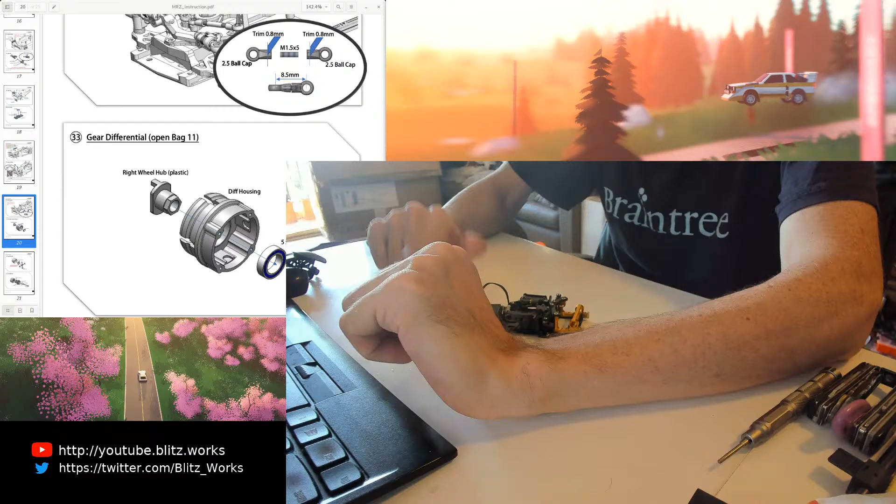We're live. Okay, so we're going to be building the MRZ a bit more.

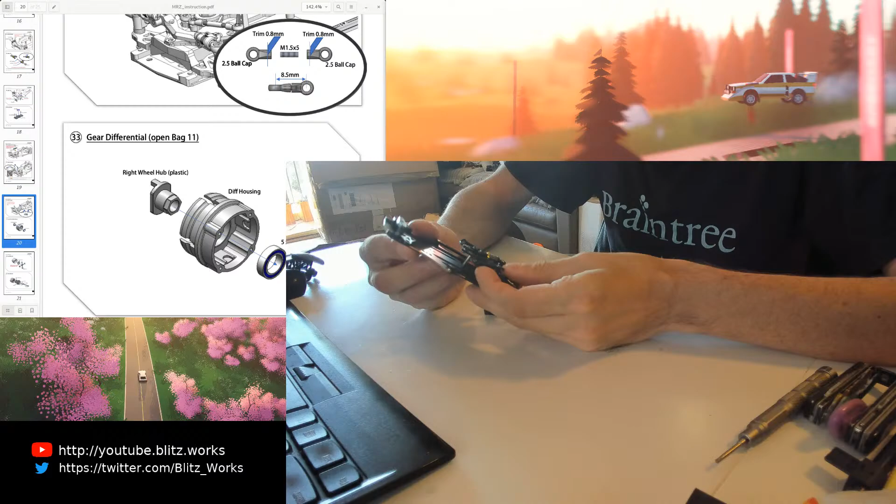Now, I wanted to do something a tiny bit different. I'm just inspecting, actually. Before we do that, let's turn on some lights, because it's really dark here. There we go, that's a bit better.

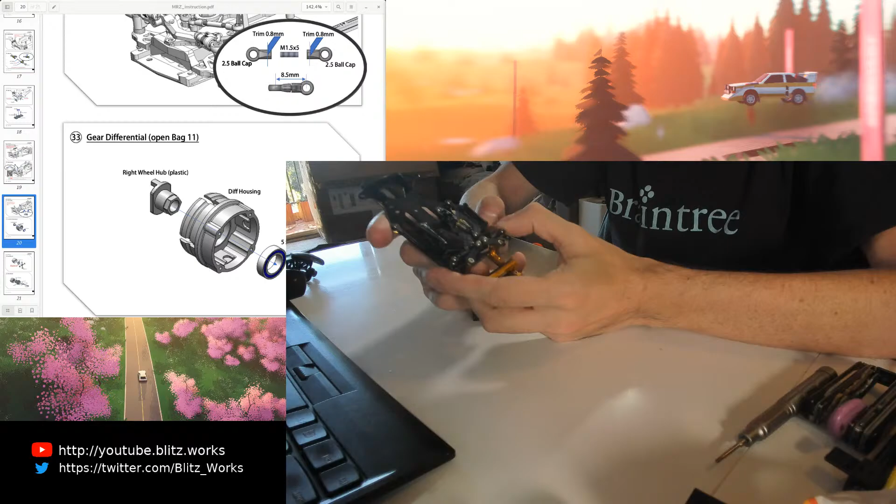Just inspecting the top part here where I ended up putting some nail polish. Let's add a bit more light while I'm at it. That seems to have come out fairly well. I wonder if I can get that sheen on it so you can see it. Black on black is actually really hard to photograph, but there you can see at the top there. Doesn't look too bad.

Looks about the same in real life, but that's fine. Let's just adjust the light a bit more.

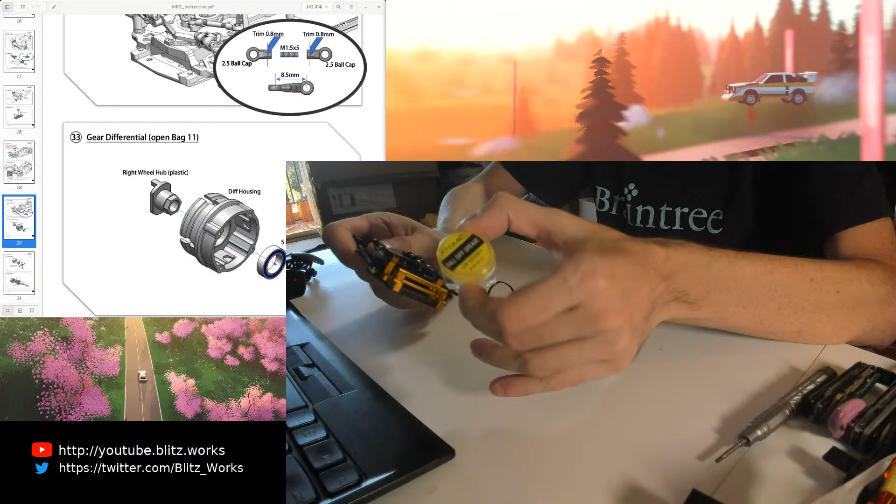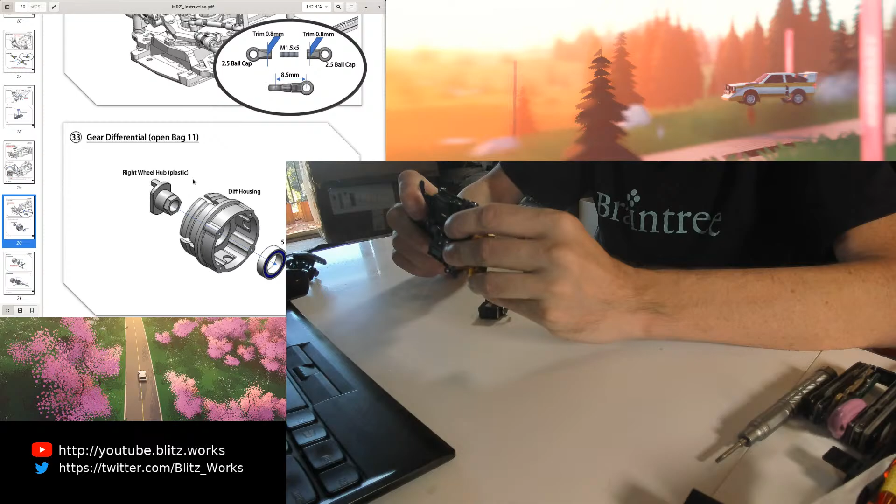Now, I thought we'd do something a bit different. So we're supposed to continue on with the front steering, but I looked to my left and found out I had the ball greases from Atomic. And I thought I actually might work on the rear diff here, as you can see, and get that built. Then depending on how long that takes, if I've got some time, finish off the front suspension setup.

Wow, that rear suspension setup is actually pretty solid. I'm really super happy with that. I think that alone is going to make it a very nice vehicle.

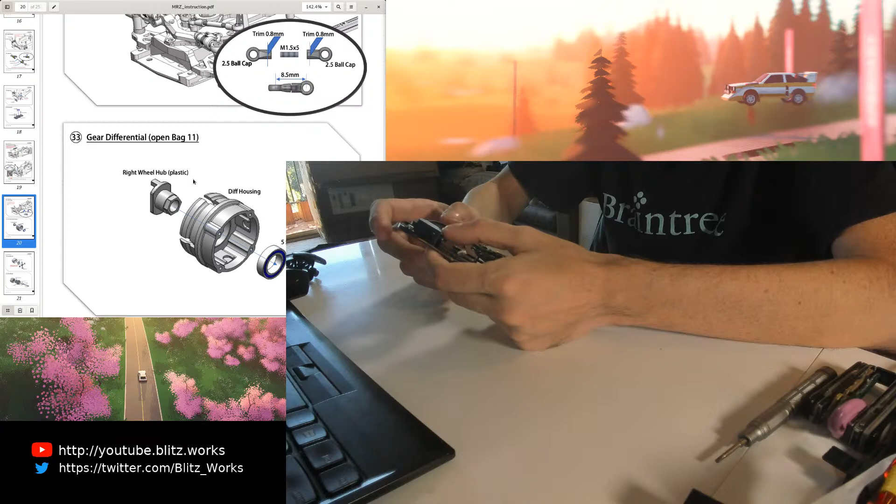The other thing is I had one of these spare, just one of the high voltage Atomic servos. Fits perfectly in the front here, as you'd expect, because it is an Atomic car. I could have used my normal ones, but I had one of these Atomic high voltage ones spare, and I thought I might as well use it. The interesting thing about this one compared to the ones I normally use is this lead here was a tiny bit longer, so it's going to give me a bit more flexibility about where I put my electronics here.

When I did just a quick pre-fit, I didn't actually have a lot of space here, and from memory I needed a slightly longer cable, so basically it's a good opportunity to finally use this one up. That works pretty well.

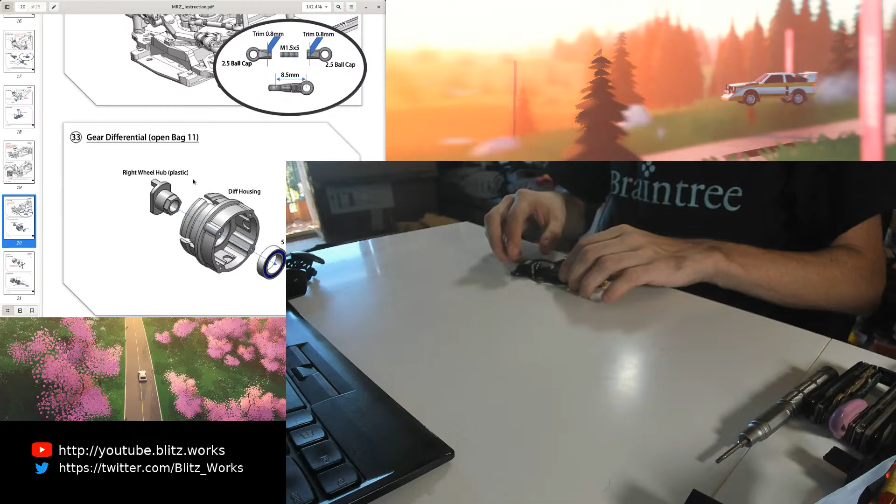Cool, without further ado, let's get into building the gear diff. So we're going to need bag 11, and it looks like all the gear diff stuff's in there. I'll put this to the side for the moment. Hopefully I don't need it anymore.

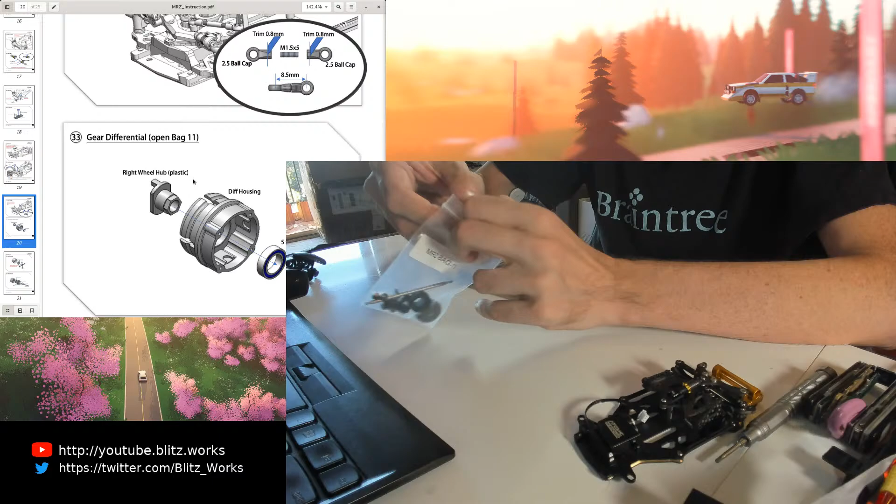I had a quick look at how the construction goes with this, and it seems pretty straightforward. As I said in my pre-review of the manual, it does have some innovative features in terms of changing how many teeth are on the rear gear. So I think that if you're jumping between tracks, that'd definitely be a bit of a killer feature.

So you've got this little gear thing. Actually, I might just quickly set the focus on the camera so it doesn't do that shimmery stuff. Turn off autofocus, update, let's put that at 20.

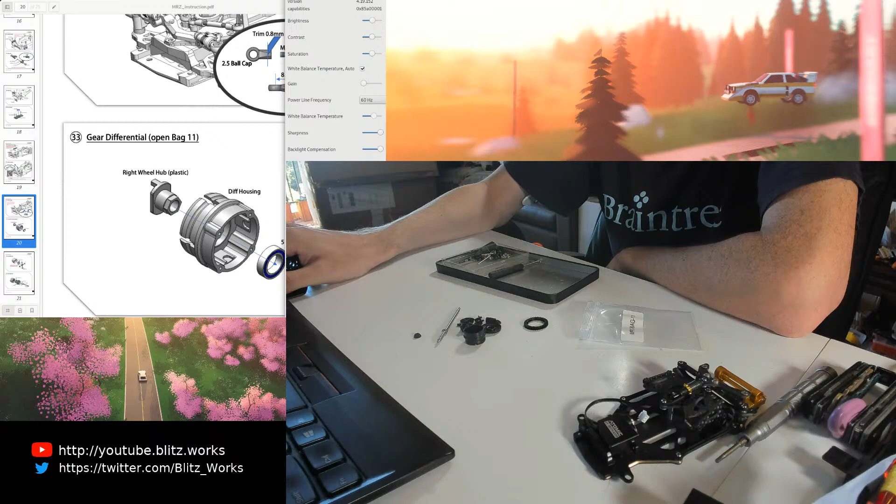15 is good. So we've got this gear piece here, and that just slides onto this. Normally you'd end up replacing this entire piece every time you want to change gears, but with this one you can just, without disassembling the rear diff, slide this piece on and off, which is kind of awesome.

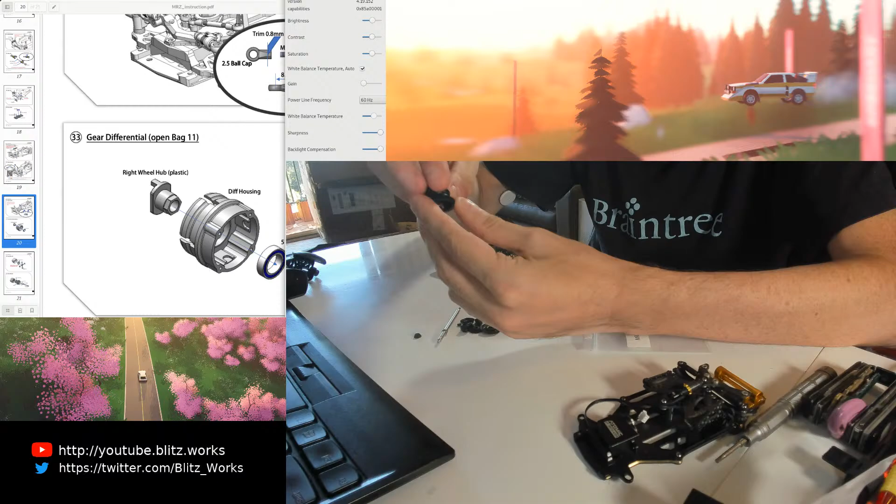So a quick look at how that all goes together now. Okay, it goes like that. Cool, so let's close this silly little window here first.

Gonna need some ball bearings as well, which are probably in another bag. Yes, they are.

Now, the one thing I have not decided is if I go for a stiff grease or a light grease with the rear diff. Still a bit undecided.

These bearings all do look the same. Do I need a half shielded? I'll have to measure this up with the calipers, I think.

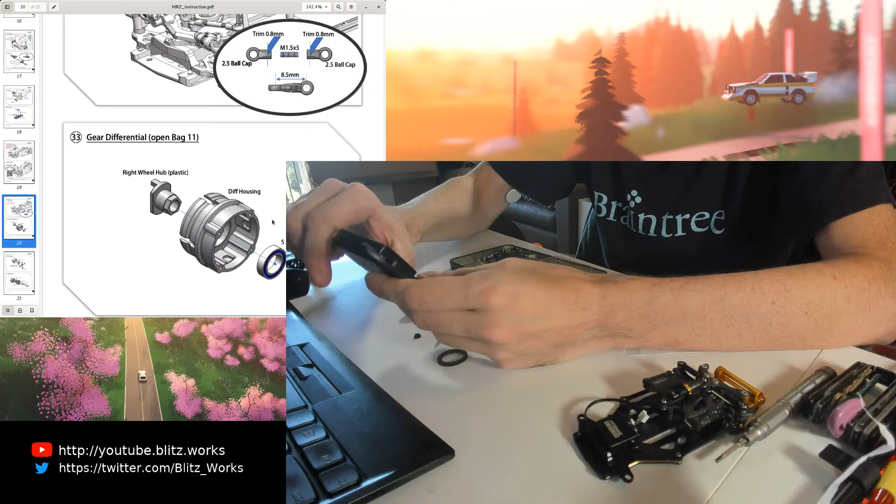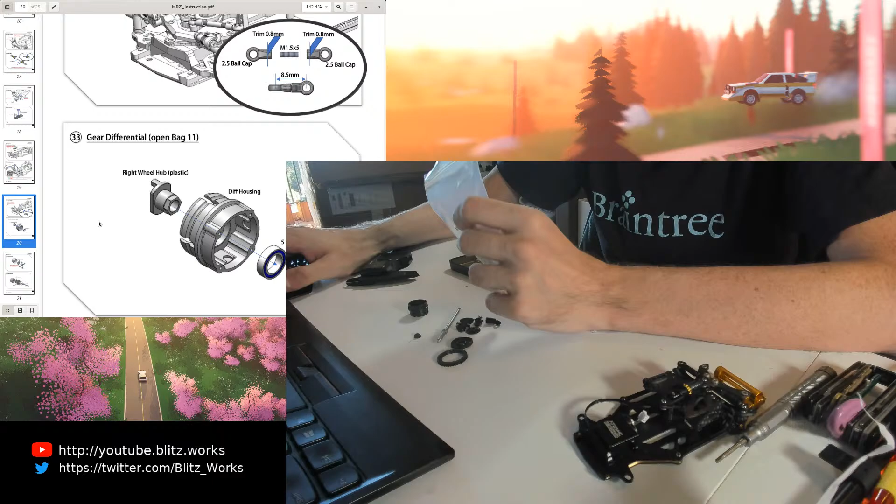We can actually compare it by going up or down, probably down. Okay, so that's a completely different one. So what we can probably do is just measure this against the shaft to see if they fit or not. 362, that fits on, and then this was a 582, so that goes on that plastic piece. So I think I do actually need a larger one.

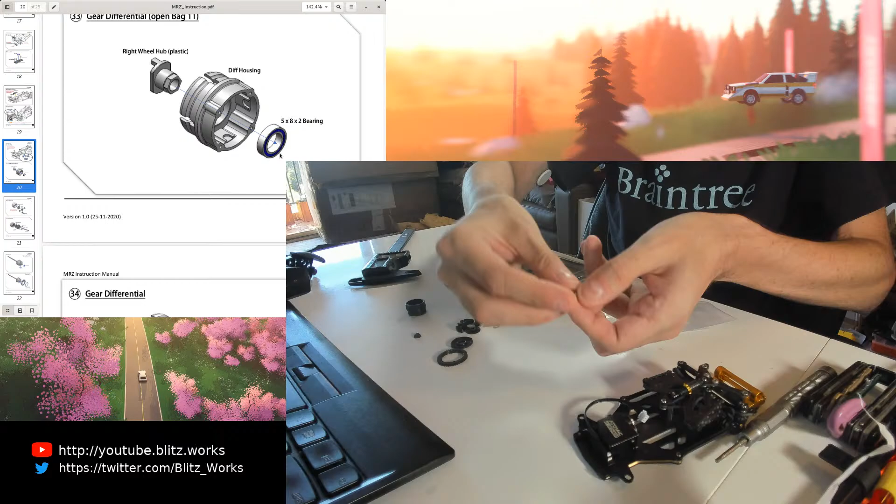And I'm going to pick, maybe it's this really, really large one. Yeah, actually looking at it, it might be this one, there's only one of them that's this large. Put that there. That's 8 on the outside, yep, so that's the one I want. Now this is half shielded on both sides, half shielded and no shield. So I'm going to put the half shield on the outside.

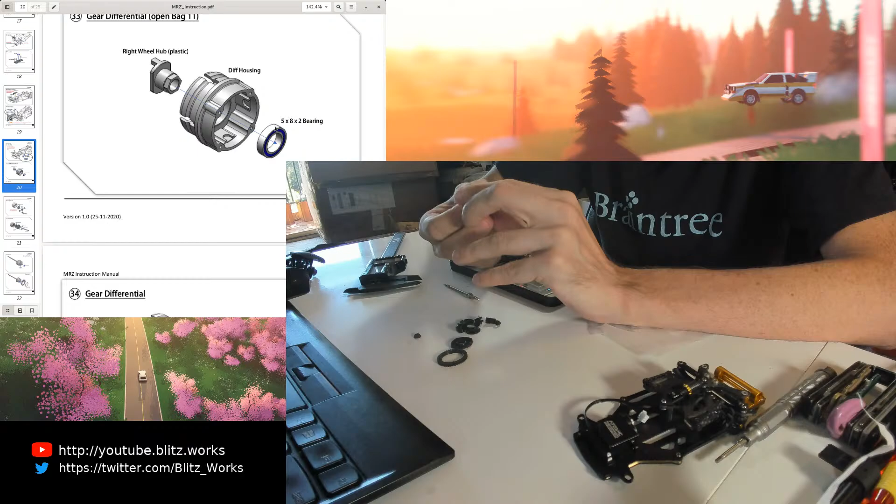Well, it's hard to tell. This picture shows a blue ring here, so that might indicate the half shield goes on the inside. But whatever, it's not going to kill it. Actually, having a look at this, I kind of feel the half shield should be on the outside. So this looks like a bit of a tight fit.

Get my pinky in there to see if I can force that in. What I ended up doing is forcing the bearing onto my pinky, then press fit that in. That looks pretty good.

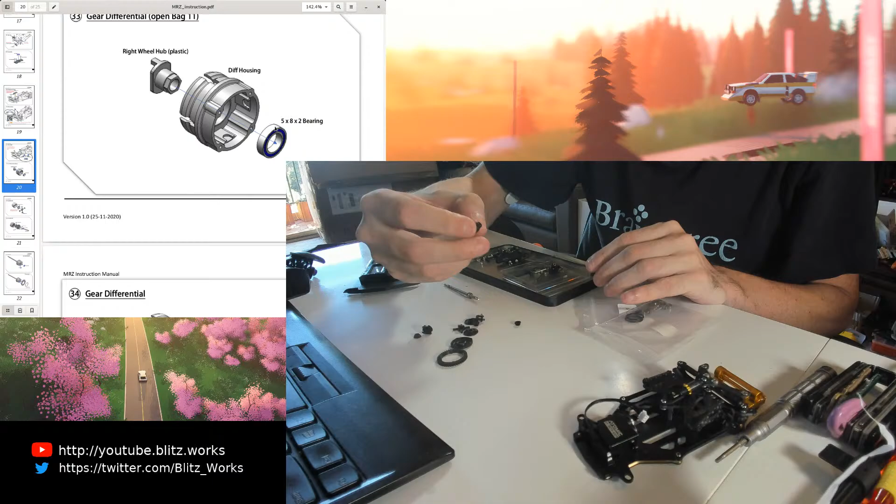Now we look for the bit. It's got a squarish chunk out of it. Not that one. That looks good. Did I put that on the right side? Yes, I did.

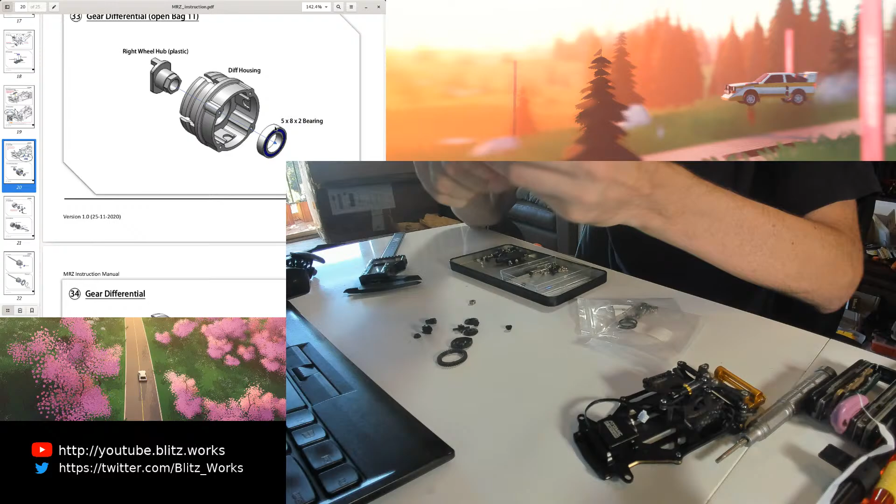Funnily enough, I can actually use this rod to provide force on one side while I push from the other, which is kind of nice, but I probably need to push down with some force on either side, which is a bit difficult. There aren't many tools - could probably do it with a pair of pliers, but didn't want to dig through my pile of stuff to find them right now, so that didn't really go down at all.

Let's try that again. Maybe that's as far as it goes down.

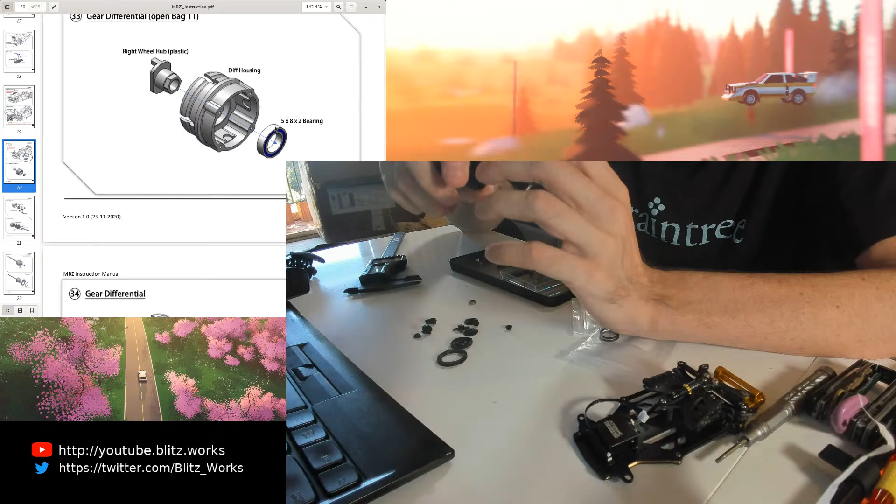I'm actually checking the next picture. So I've got that surface flat with that, and I'm pretty sure it's supposed to protrude given that it's hexagonal. Yes, it is - if you have a look in there. What's going to be the best way to do this? Probably force it down like that.

Yep, that seems to have worked pretty well. And then we can just push the bearing from this side. That looks good.

Awesome, so next we move on to this part. We're going to put this gear stuff down first, making sure there's no edges it could catch on the inside. This plastic looks like it was molded pretty well, so I don't really have any concerns, but just rubbing my finger back and forward, there's a couple of higher spots.

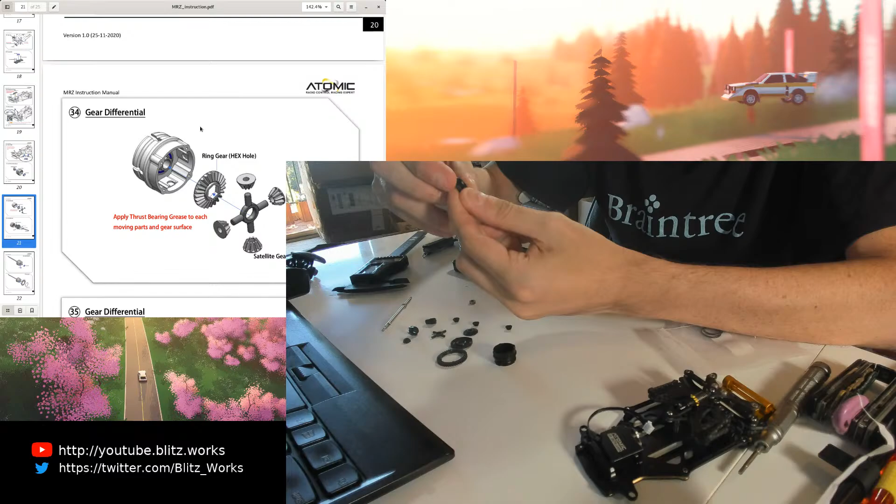We do have some tricks we can do here - they did actually provide some sandpaper, so we can make use of that and just run it back and forward a couple of times. Oh, it's not easy in the slightest. Wonder what grit this sandpaper is - it must be pretty high.

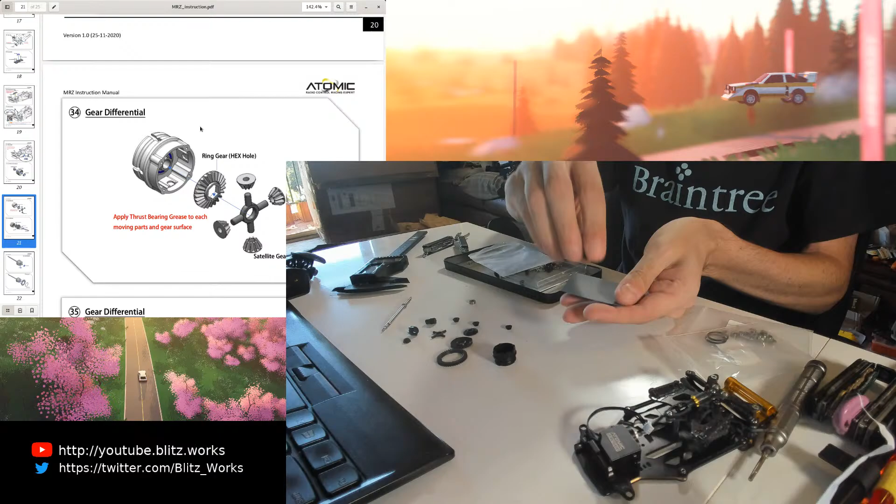So I'm actually having to go pretty lightly here. Okay, and then we just rotate my finger a bit more. Those high points seem to have gone, so that was actually pretty effective - definitely worth doing that.

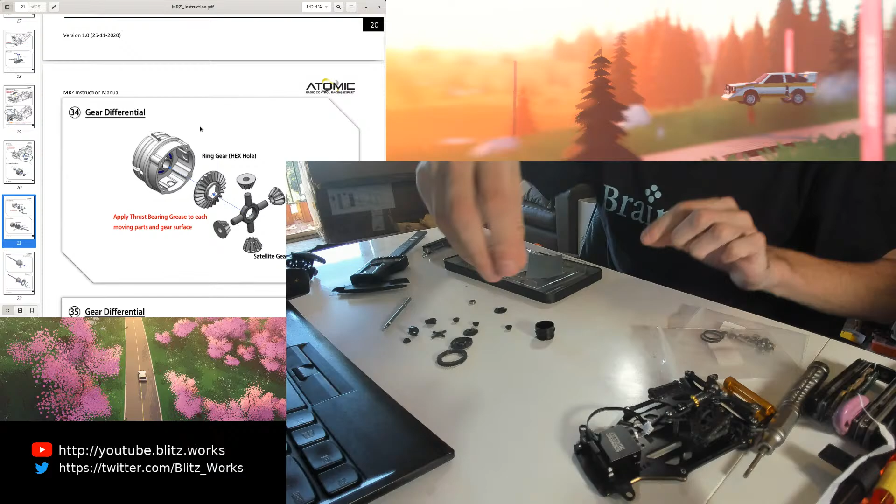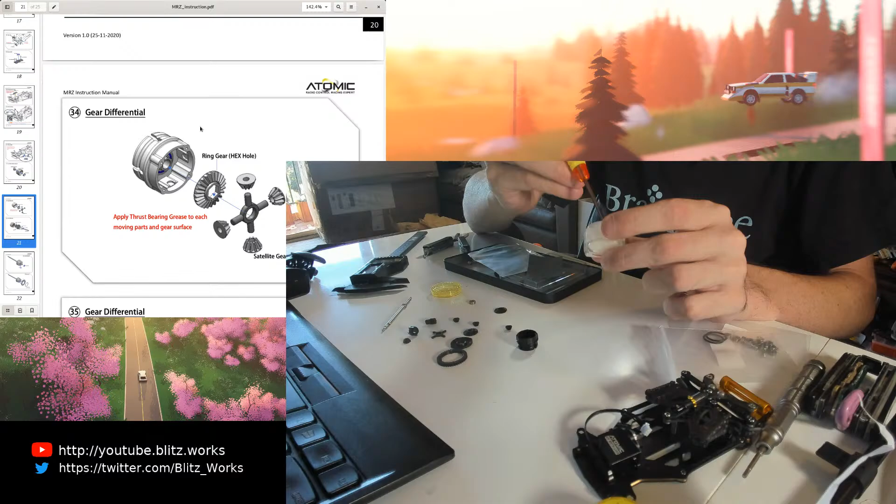Now I actually suppose I should probably make the decision about what weight ball grease I use here - do I use a high viscosity or a low viscosity? I think I'm going to use the low viscosity. The reason I have to decide now is because I want to get some grease on the inside there, and it's easiest to do that now rather than filling the gear diff up with grease later. It can make it a bit messier and harder to get on, but at least you can guarantee you've got grease underneath the gears.

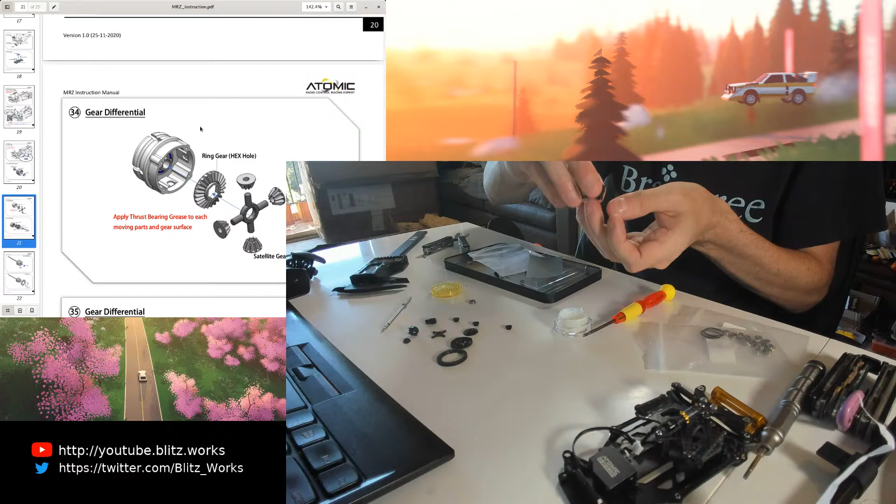Okay, so a whole bunch of white stuff in there. Get the gears stuffed on now - watch as my fingers get really messy really quickly. That's fine, because that is rotating super smooth, so that was definitely a good idea.

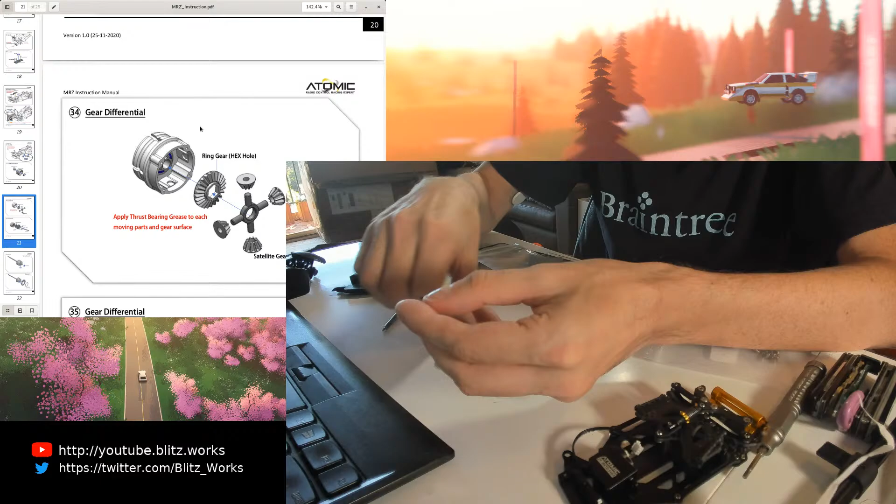I did notice with all these gears, they're not perfectly circular - two sides have been smoothed off, which is fine. Doesn't appear to have an impact, but just worth noting.

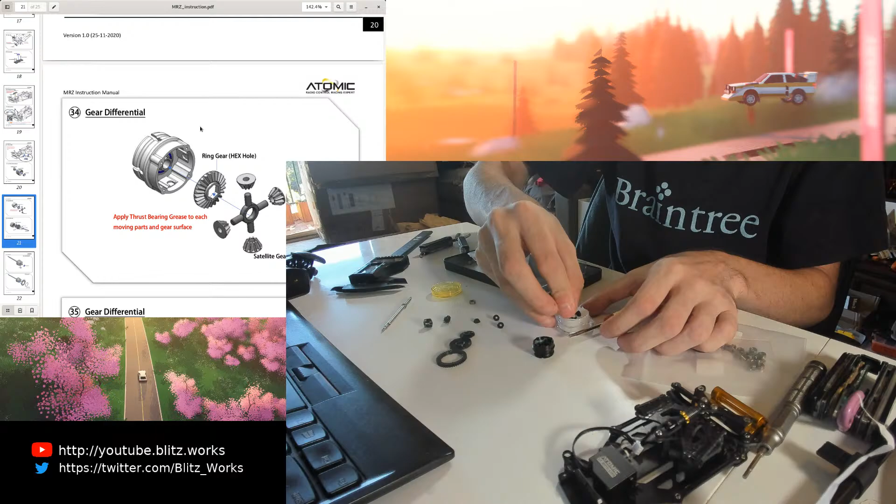The other reason why you want to coat the legs of the spider with grease is so you can do that - you can see the gear at the bottom isn't falling off, so it just holds everything in place as well as lubricates it, which makes maneuvering it around a lot simpler.

Now I'm actually going to need tweezers, I think. We'll use this instead.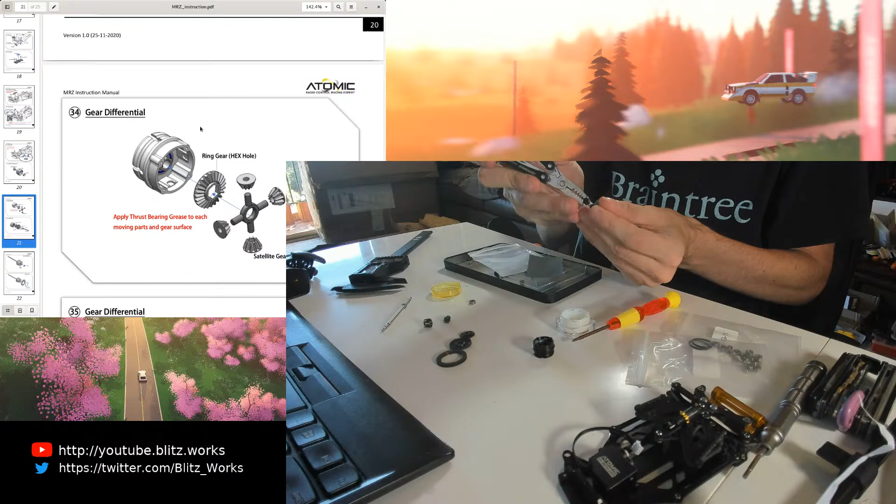You do have to be aware that you are contaminating your hands with grease at the moment, so keep a tissue close by and clean as you go, because otherwise you end up with grease on the weirdest things. This is contaminated with grease, but I'm just being cautious around it more than anything else.

So they're saying to put thrust bearing grease in, but they tend to just suggest greases at random. That's why I'm using a ball diff grease.

Okay, that's all rotating in perfectly. I'm just rotating it in now. You might not be able to see it, but the small gears are rotating, and they're actually rotating pretty smoothly. What's more interesting is normally when you do that, the diff will actually pop out quite easily, and that one is staying in place, which is always a good sign that you've done something right.

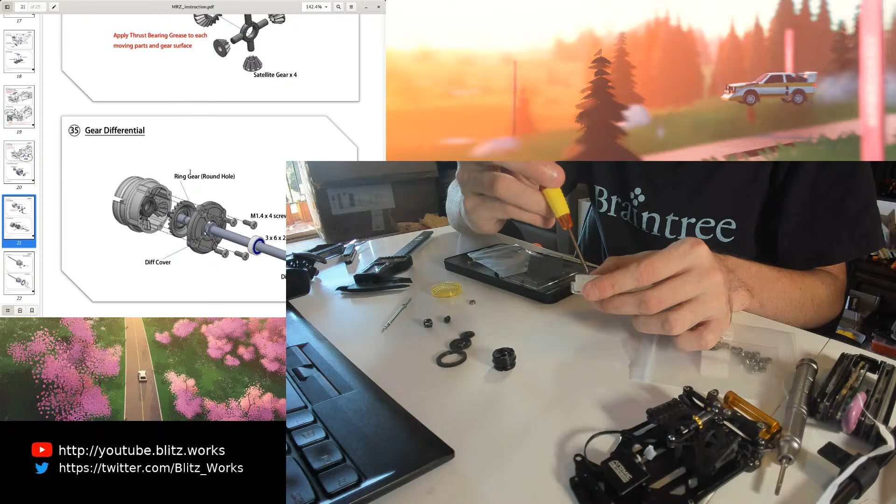So the next step is actually to seal up the diff. I'm going to take this opportunity to just pack it with grease, and I'm not going to really care if the grease overflows. Just trying to make sure it gets into all the nooks and crannies.

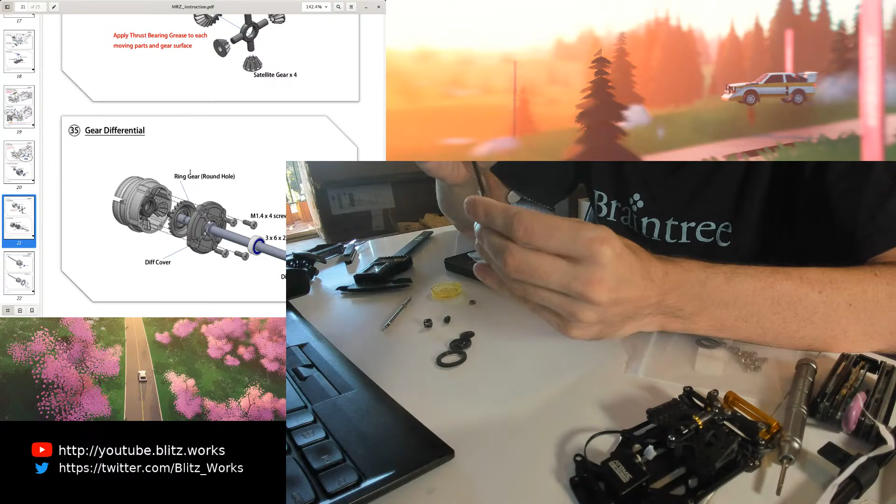Even if you want an air quote open diff, you still definitely want to get some grease in there. You just probably want low viscosity grease, and one that's more of a paste rather than an oil. Under high speeds especially, the oil isn't viscous enough that it'll fling out. But not only that, the higher the temperature, the less viscous it becomes, so anything that's almost a liquid to start off with is just going to become super thin as the diff starts rotating.

So you're better off with something a bit thicker. And by thicker I don't mean stickier, I just mean more of a paste that will basically liquidize once the diff is under power.

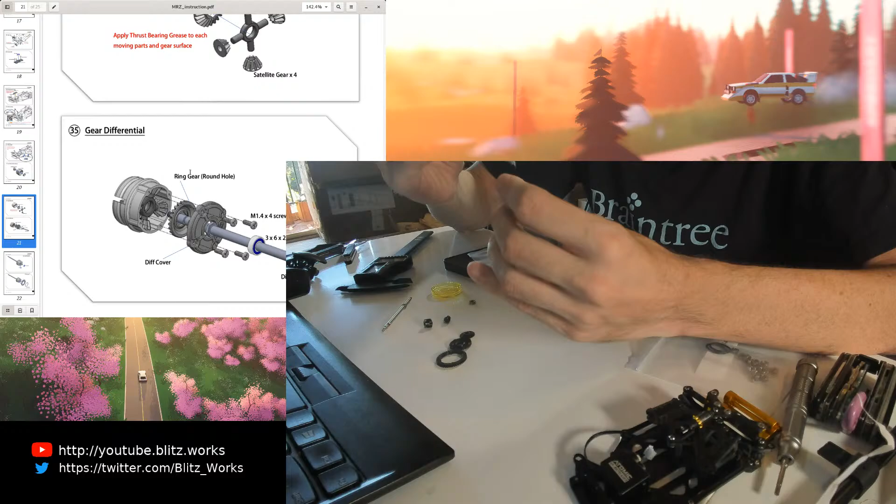Cool, let's clean that off because I'm not going to need that again. Let's put the top gear on. See how that all fits. It's looking pretty good, bit of overflow, but that's alright. That'll be captured in a sec.

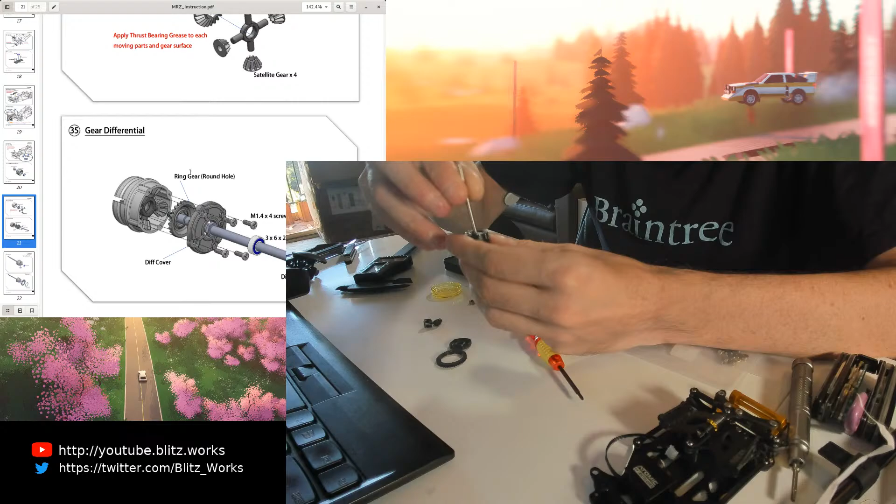Now, from what I understand of this diff, I can just put this through the center here, like so, and rotate. I'm just rotating in both directions to pick up the grease and seeing where it overflows, and that's looking pretty good.

And then, if I've got this right, I should just be able to put the cap on over the top and rotate it into place. Perfect. So now let's see if we can find the screws I need for this.

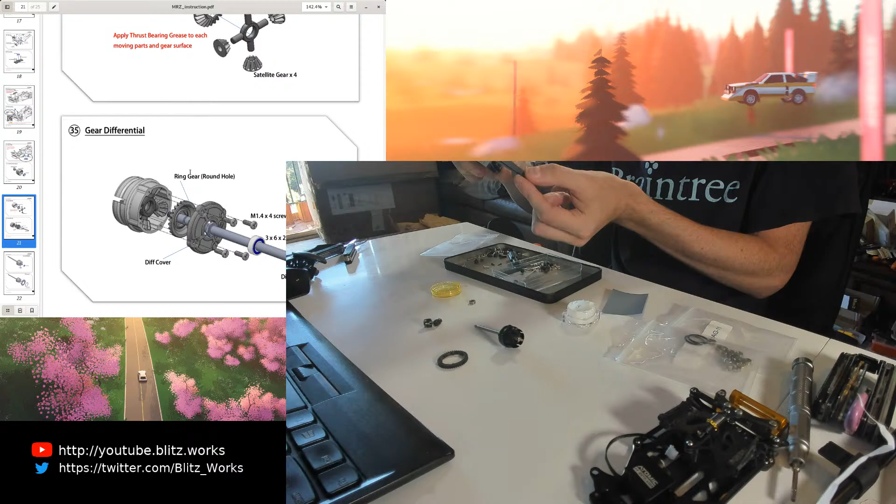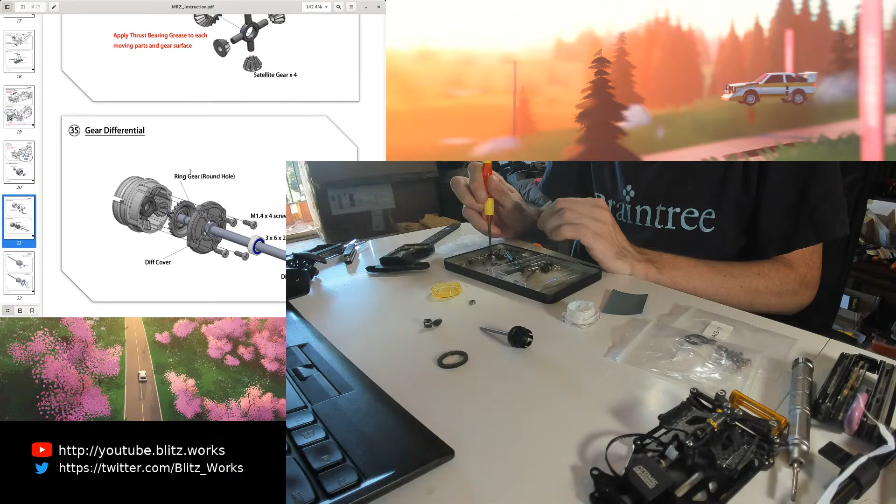So okay, it is these smaller screws. If you're ever in doubt as to which screw goes in there, definitely just eyeball the screws, because more often than not, that's actually telling as to what screw goes in there.

Unfortunately, there isn't a good camera angle to watch me screw these screws in, but then again, that's probably not the most interesting thing in the world.

Now, I did talk about making sure your hands are not contaminated with grease. And where that becomes important is not getting that grease on the surface of your screwdrivers. Some of those greases are slippery and some of them are fairly grippy. But either way, you'll find that if you're having to apply a lot of force, your hand is going to slip on the screwdriver and contaminate any plastic grips like that if you do have them.

So we're not over tightening these screws, we're just getting them to sit flat. It's very easy to over tighten the screws on the Atomic diffs, and that ends up ruining them very quickly. You might not notice it the first time you do it, but if you ever have to unscrew it and rescrew it back up, you'll find that you'll have to tighten it even more each time you redo it, and eventually you end up splitting the plastic.

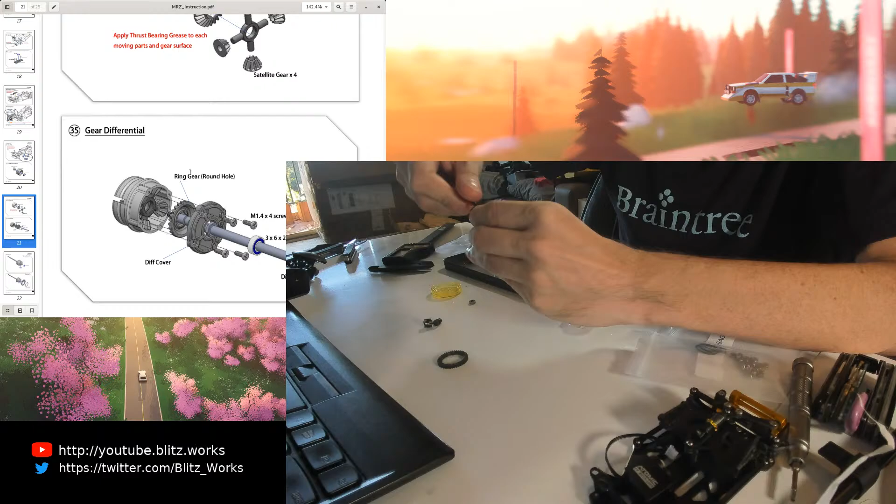So just enough to be tight, don't have to apply too much force. Once it stops turning, that's it.

And then once you've got them all in, you just go back in and tighten them all again, just to be sure.

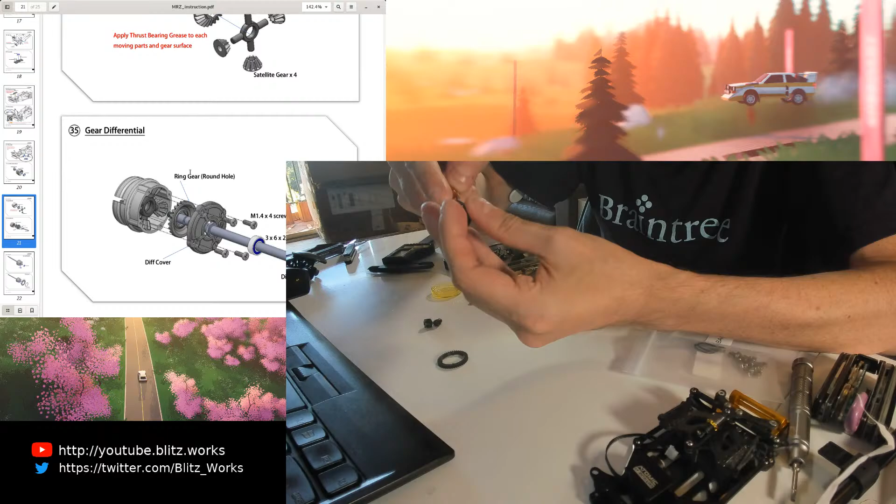Okay, so this diff is looking pretty solid. Compared to most of the atomic diffs I've constructed, this has been pretty decent actually. Pretty good all in all.

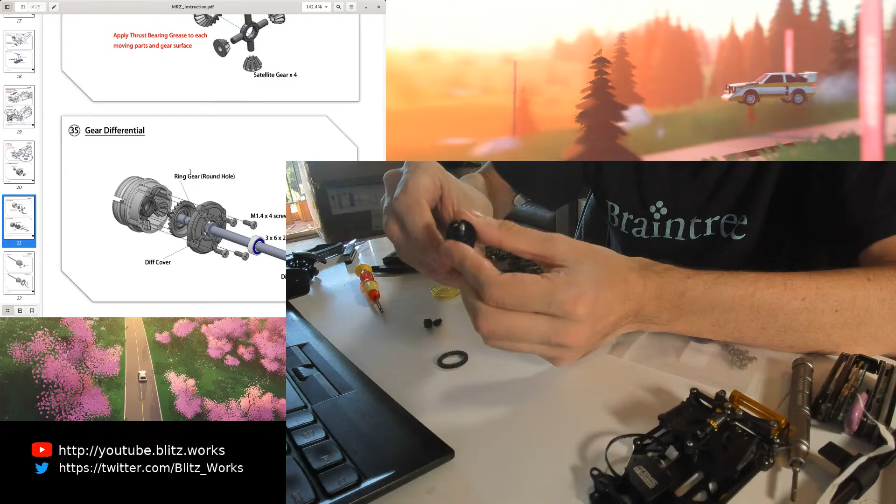Haven't over tightened it, haven't done anything else, it's gone together pretty well. Even that light grease is probably a tiny bit too much, but maybe that'll wear in a bit. Just trying to make sure it's not over tightened. I'm sure it'll probably loosen up once it's all compressed.

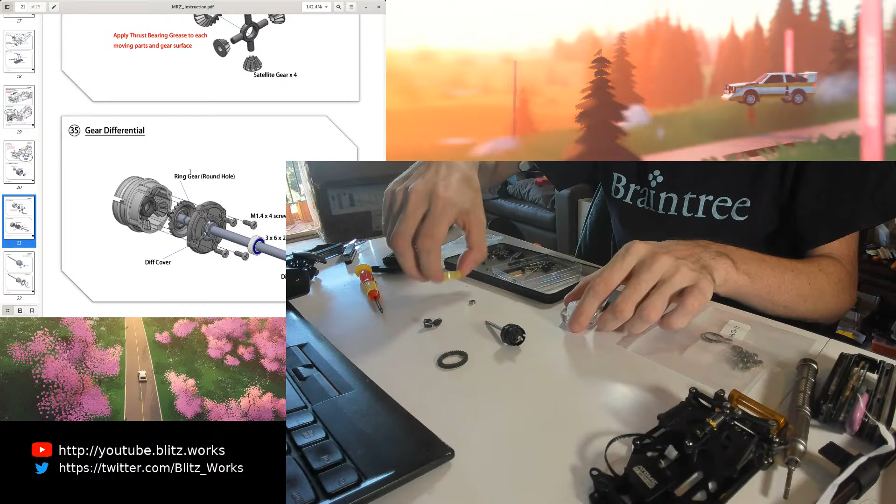Whoops. Well, that's interesting, so that doesn't stay in like that. I really did pack that in with grease, and even though it's a light grease, if you have that much grease in there, if you pack a diff with grease, basically, it doesn't matter how light it is, it will actually tighten up a bit.

So I could have probably done with a tiny bit less grease, but I wanted somewhere actually halfway between high viscosity and low viscosity. And I can always gouge that grease out later if I need to. I tend to find with diffs that after you've run them in a couple of times anyway, they do tend to soften up.

And I'm just going to tighten that one more time. Now I did say that this diff does not have a lip on this cap that I'm just securing. And that's why I'm tightening it up a bit, because when I built my GLR, I had a lot of diff grease actually come out of the edge there.

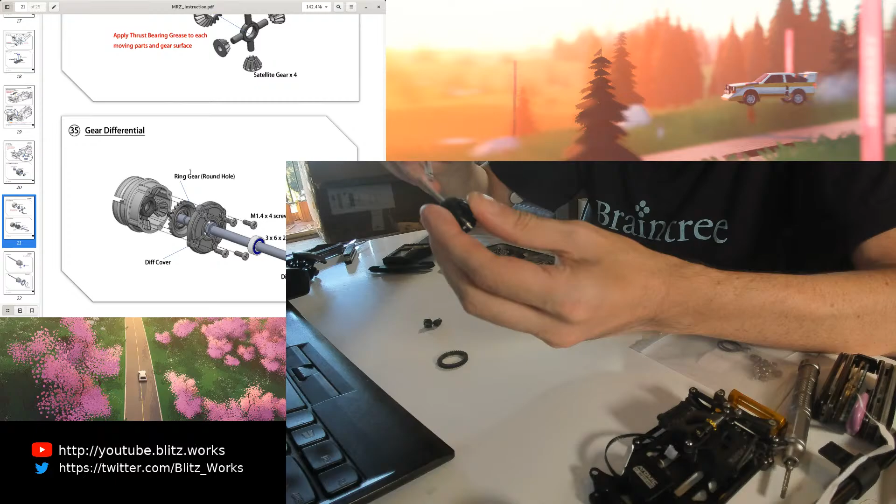When running with a 12,000 kV motor, it got so hot on the ball plates the diff oil became a liquid and actually sprayed out. And while I was driving, I could see this little spray from one of the tires where it was just diff grease. It was kind of incredible.

So need to chuck a ball bearing on there. Let's chuck the half shield to the outside.

How am I going to do that? Let's squeeze it a bit and push it down.

Not sure if that's supposed to stick up a bit or... Okay, no, that's gone down. Good.

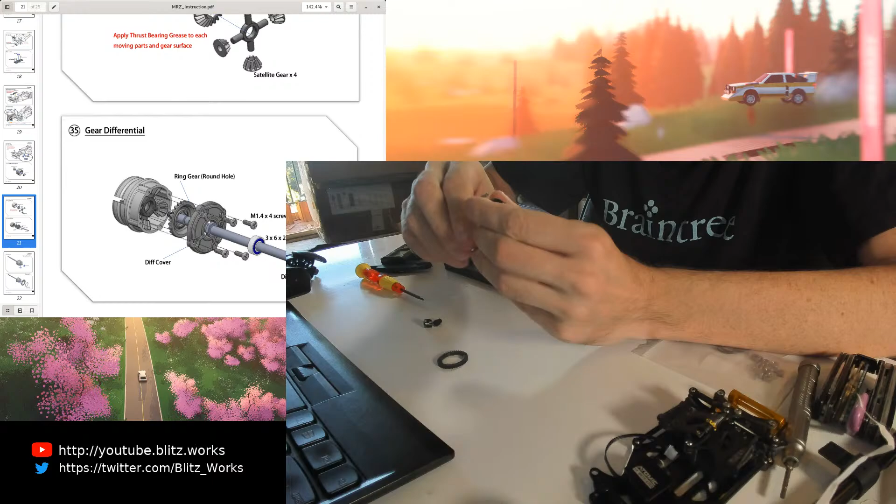Okay, that's made the... that's centered the gear diff a bit, which is good.

362 and a 362, so then want another one on the other side. Which, I mean, all in all, that actually makes the gear diff pretty heavy if you think about it.

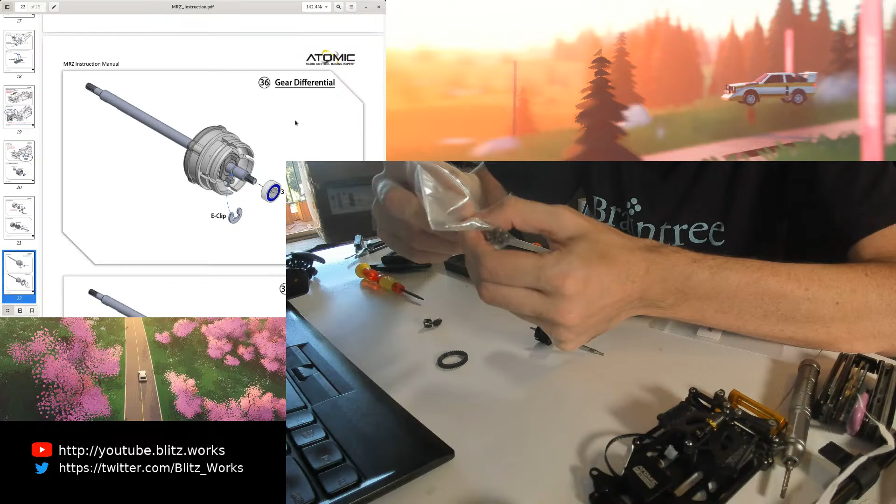Pick one of these nice big ones. Perfect, and then we can push down again.

Make sure you push down on the outside of the bearing as well, not on the inside. I guess it doesn't matter if you push down on the inside too much, as long as you're not pushing down on the little metal sheet. That's definitely what you don't want to do. So you actually want to either load the outside or the inside, but not where this blue part is.

So now there should be room for an E-clip. I'm not seeing that, however. So I'm just going to pull that back out and see if I put too large a bearing in there.

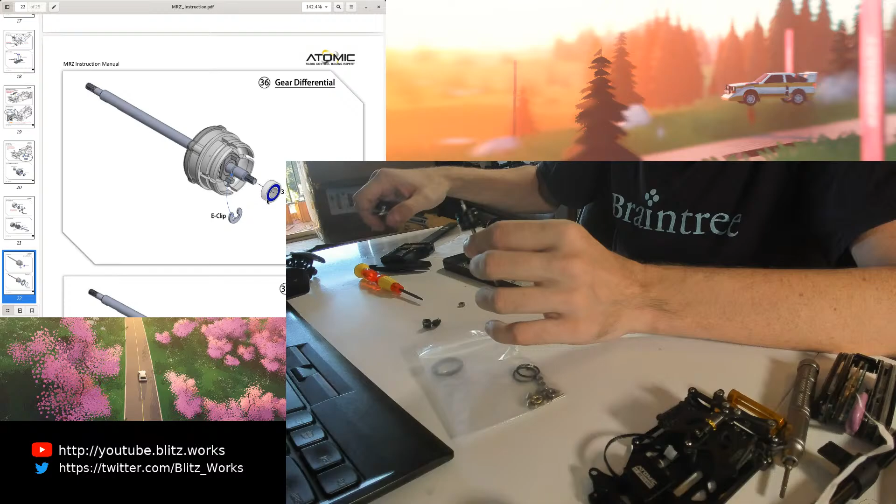Maybe I did. While that's also happening, I just want to quickly see if I can find my E-clip pusher, because I actually have a dedicated tool for adding and removing E-clips. Oh, what's that from? Oh.

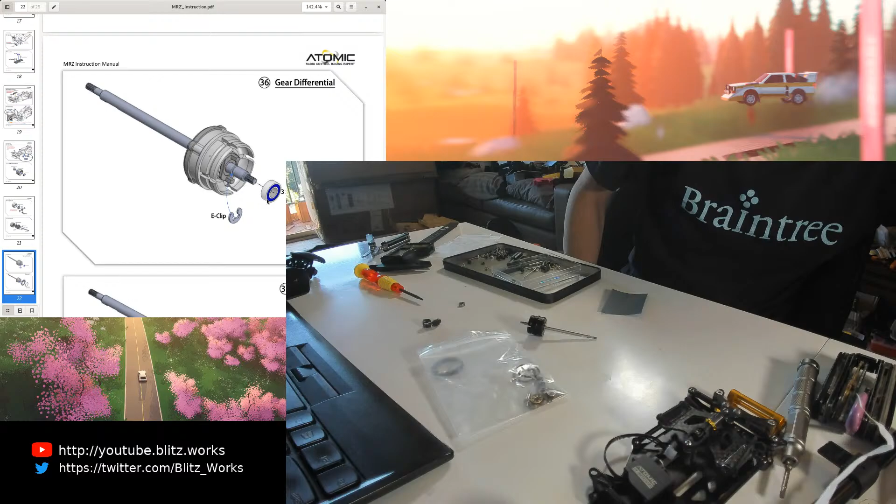And unfortunately, all my tools are all over the place at the moment. So... Nope, okay, I might have to do this with pliers then. Such a shame, that E-clip thing is a lifesaver.

So I'm just going to remeasure these bearings as well. There's two different widths here, and I'm wondering if I just put the wrong width on for this E-clip. While I'm at it, I'll grab one of these as well, because I'm going to need that to secure the gears in.

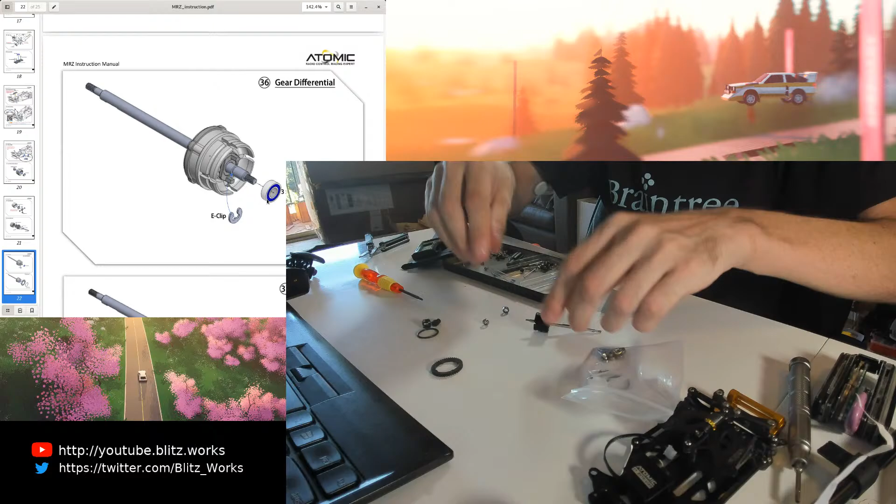So put that back together, zero it, clamp it. That's 1.8, and this is probably about 3. 2.2. So maybe I do have my ball bearings mixed up here.

So I'll just pop this one back out. Swap that back in. Can quite easily swap this over.

Push it back down. That's right, this one was a bit difficult to push down, wasn't it? So rotate and push. Yeah, and that's sitting a lot flatter, so let's go with those.

Put those ones back.

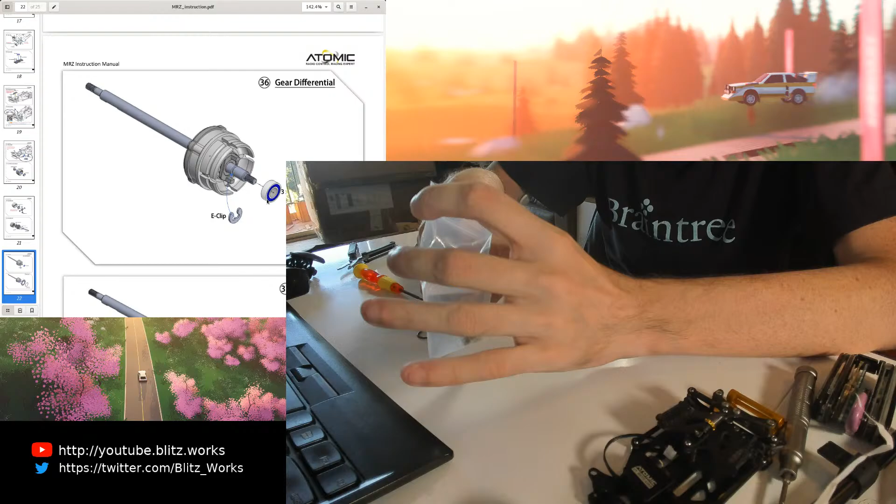Hopefully this time when I put this all together, I'll be able to see the E-clip line. So there's a little line about here for the E-clip. Yep, and I can see it a lot clearer. So those are the right ones I need.

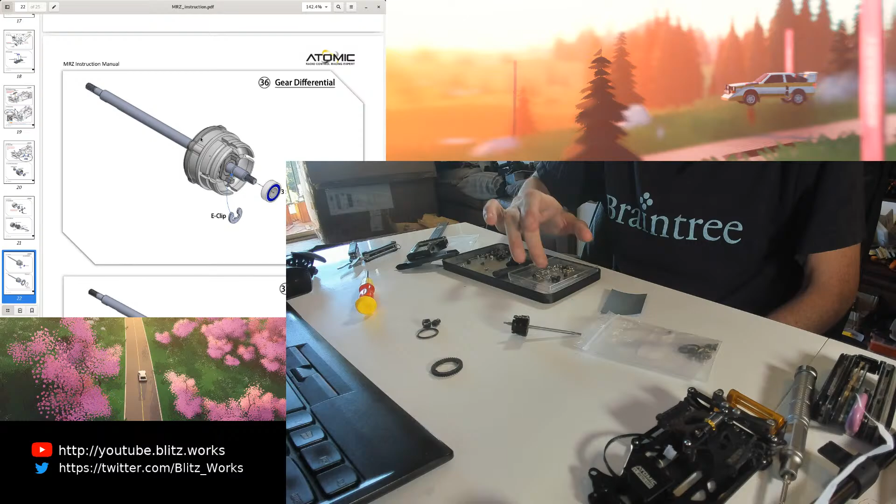So where did the E-clips for this go? Are they in a bag I've already opened? Fingers crossed they are. Maybe, maybe not though.

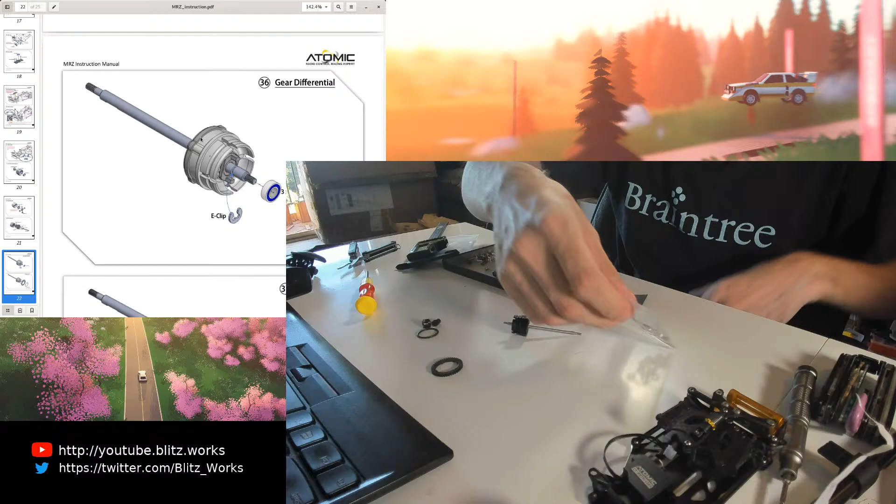Okay, so they're not in the ball bearing bag. Oh okay, so they're in the spacers bag.

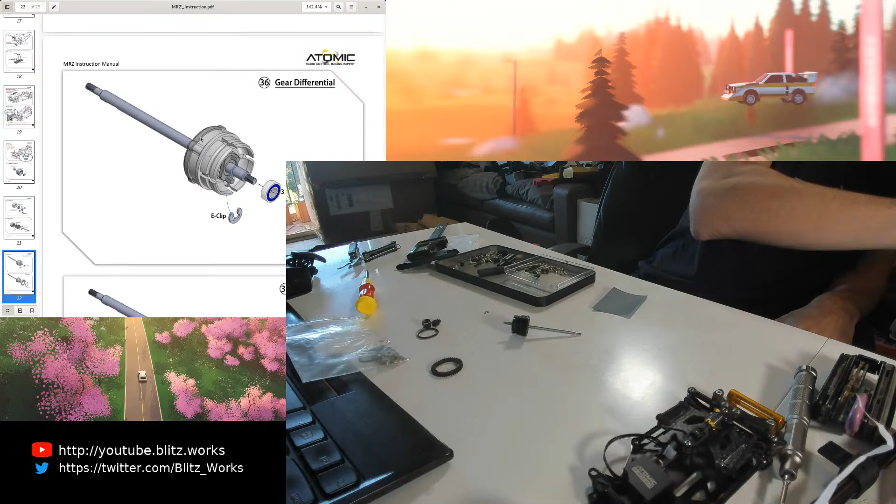So I'm going to have one more look for this E-clip tool because it's absolutely incredible, and I really don't want to be without it. Okay, didn't see it there. It's probably telling me that I need to organise my tools a lot better. And it's not there.

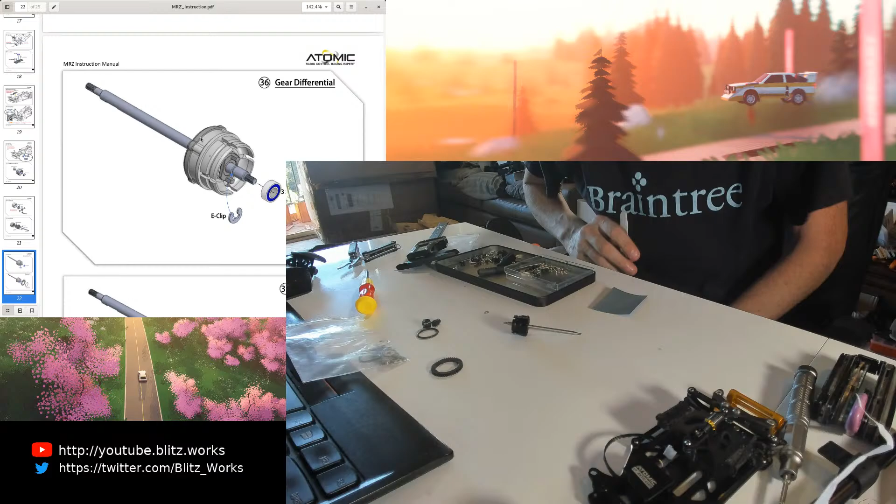We're going to have to cheat a bit. So I'll pull out a pair of proper pliers, and get this started by using the tweezers.

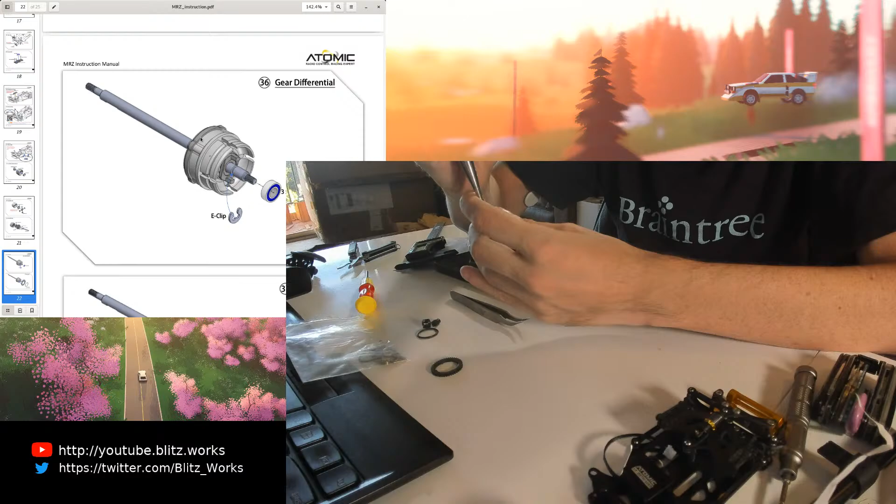Now, going back to contaminated tools, if you've got grease on something like this, you're going to have a lot of trouble working with the E-clip. They're going to stick to the tool, or even if the tool is magnetized, you're going to have a lot of trouble getting the E-clip detached from the tool itself.

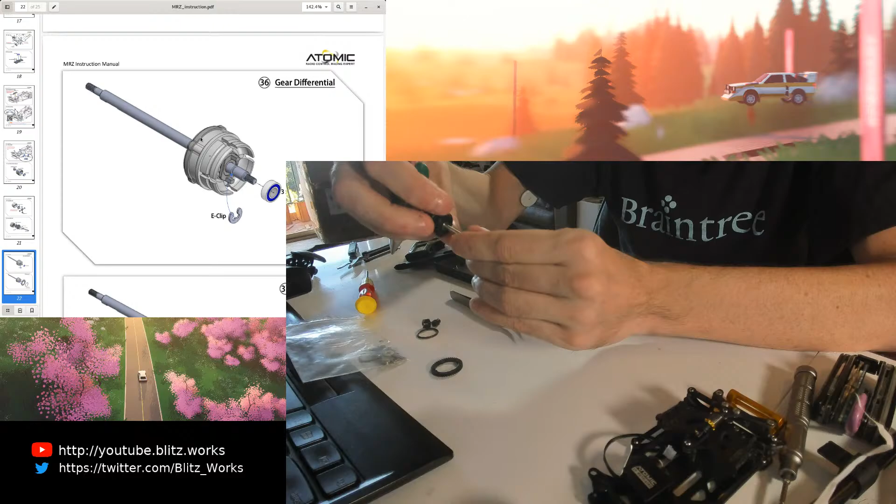Right, that's done. We now have a diff. So that was lucky, that E-clip actually went on pretty smoothly. Oh, that'll be so nice once it's broken in.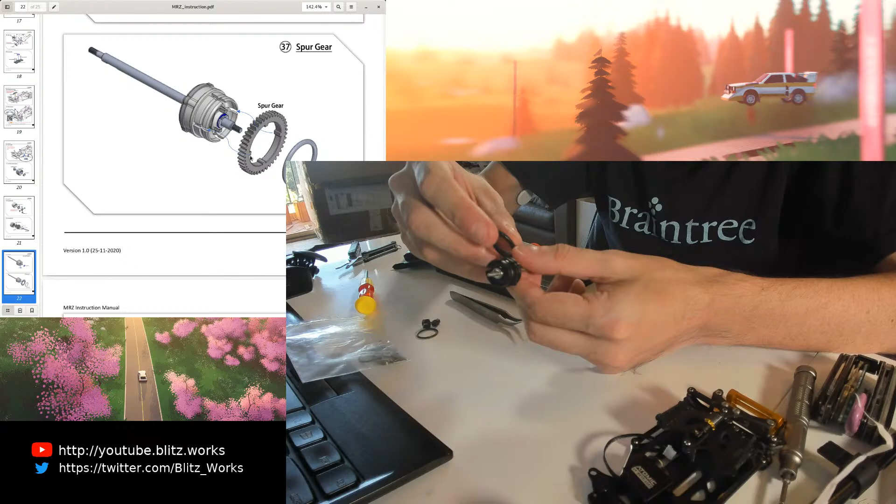So we now put the spur gear on. Now it doesn't seem to have a left or a right side, it can go on either anyway. So let's just slide this on, like so.

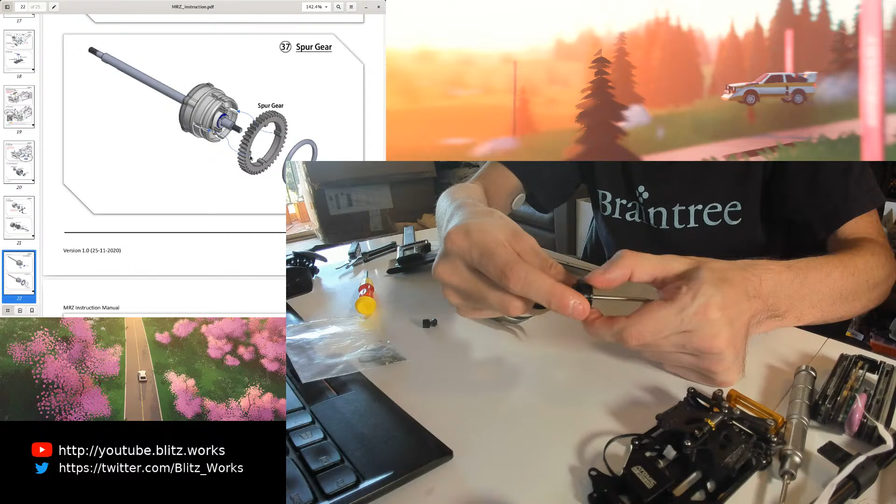Seems good. And then we put that O-ring on that quite sneakily snuck out of one of the bags earlier while looking for something else. And if we pull on it, it's actually not coming off. Seems like a bit of a flimsy thing, but it actually does allow the gear to move a bit, which turns out is actually a good idea to allow. But overall, that is looking like a pretty solid diff.

Apart from the fact that it's not a solid diff, it's a limited slip.

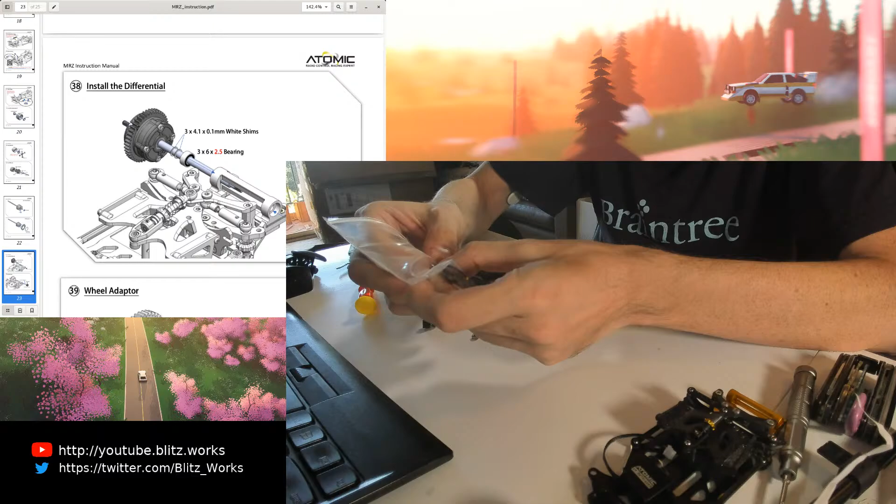I really should stop it with the jokes. People comment about my jokes and how good they are. People are very, very open about the feedback of my jokes, is probably another way of putting it. Some people love them and some people hate them.

So we are going to need some white shims here. And we're only going to do a test fit here, so it's nothing major.

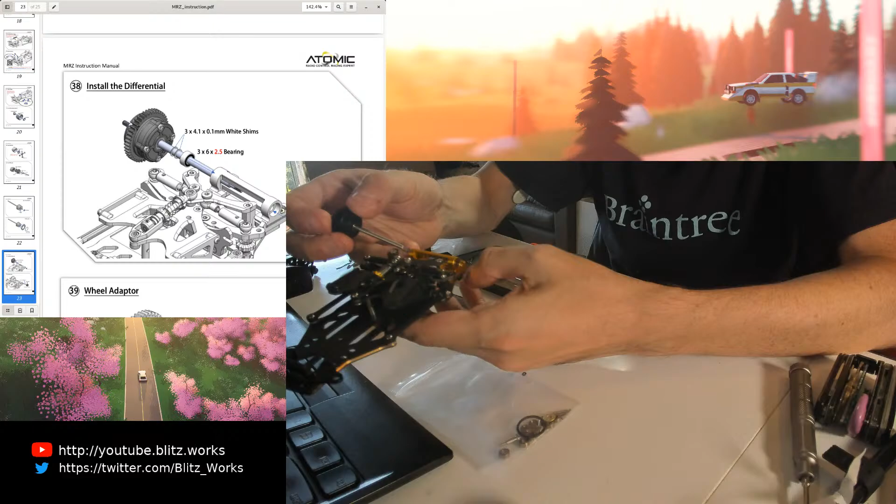Okay, so they're fully metal shielded bearings, so I'm not going to bother with the white shims or anything. I'm just going to put that on and just show off what this looks like. There we go.

As you can see, that spins for a long time. In fact, one of the bearings was even out and it was still spinning for a long time. So I'm going to say that this is a pretty...

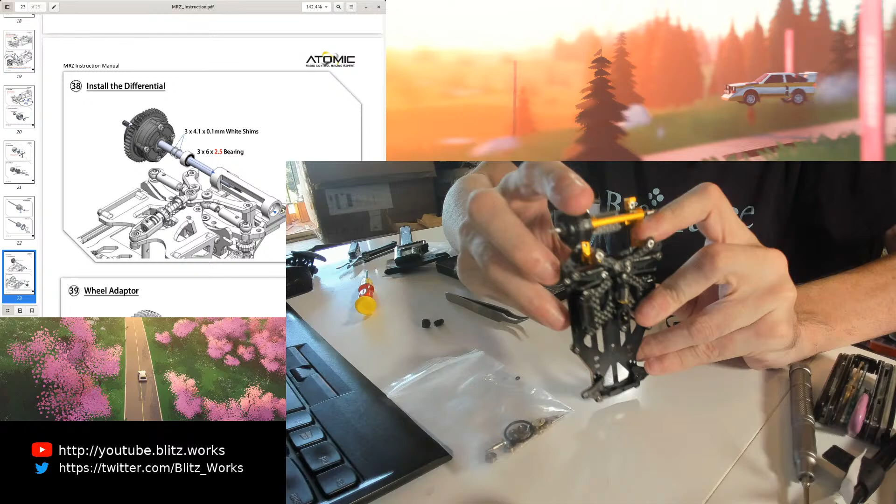Let's do that, so I'll secure it on this side. And so I think we're onto a winner with this rear diff. Very, very, very low resistance. So you should get under power a lot less torque or twisting, which is one of the issues I have with the GLR.

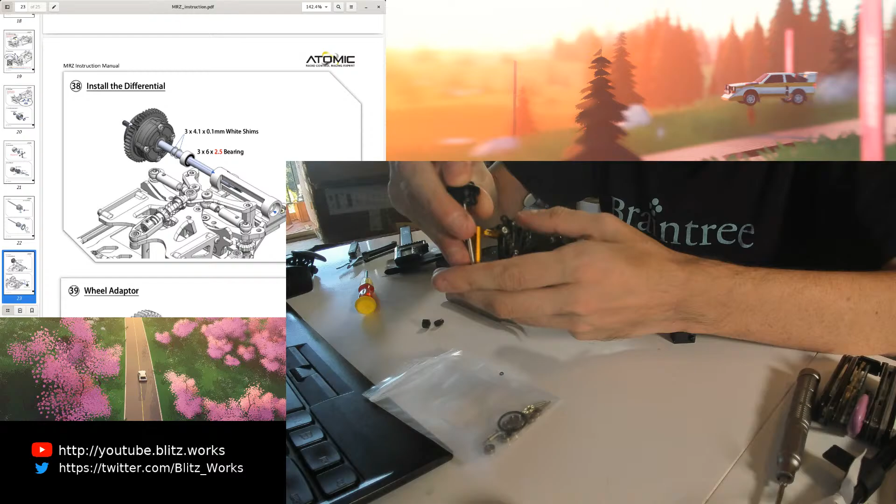And that actually might be just due to how I've constructed it more than anything else, but the GLR likes to twist under power with a 12,000kV motor. That said, everything likes to twist or have torque steer with a 12,000kV motor when it comes to the Mini-Z sized cars.

So it'll be interesting to see how this one does, well, I'm only going to run 5,000kV on this, but it'll be interesting.

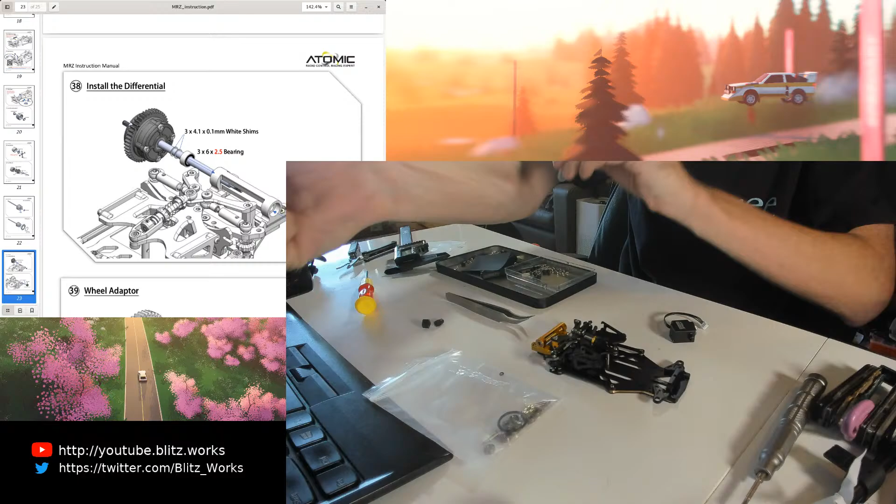So I can already feel this smoothing up, and I think just running it in a bit more is definitely going to help. This is going to hurt my arm a bit, but running it up and down my arm a bit to get some movement in it. But nothing's going to beat hitting it at full speed with a motor for a good 30 seconds or so in bursts.